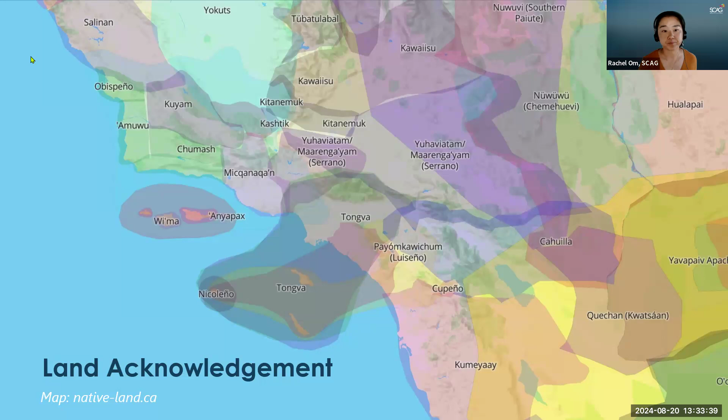So here's an overview of our agenda. We'll be starting off again with an overview of what a quick build project is and some lessons learned from quick build projects in the SCAG region. We'll hear from a few local jurisdictions, so City of Pasadena and their quick build project along Allen Avenue, and also City of Long Beach and the role of quick build projects in their approach to incorporating safety and complete

streets. We'll also hear from Caltrans District 8 about the quick build guidance that they're developing and potential partnership opportunities. We'll also share about a current funding opportunity hosted by SCAG through our Sustainable Communities program, and then aiming to have plenty of time for Q&A.

I primarily focus on managing projects, including active transportation, and as of late, a lot of quick build projects. So what we're going to be talking about in the next 10 or so minutes is a little bit about what is a quick build. So a little bit of an overview on that, typical materials and how elements are manifested through these materials. Timeline and life cycle: what is the expected timeline for implementing a quick build, and what is the anticipated lifetime of a quick build project?

And a lot of these really depend on your situation. We'll also discuss how we can integrate the SCAG kit of parts. This is a very useful tool, and I'll have a small case study of how we've implemented that on the lead up to a quick build project in LA. And then lastly, we'll touch on some lessons learned.

So a little bit about us. We've been around for about 35 years. We provide a whole suite of consulting services, primarily in transportation. And the focus of today is going to be on the quick build aspect that we have provided for several

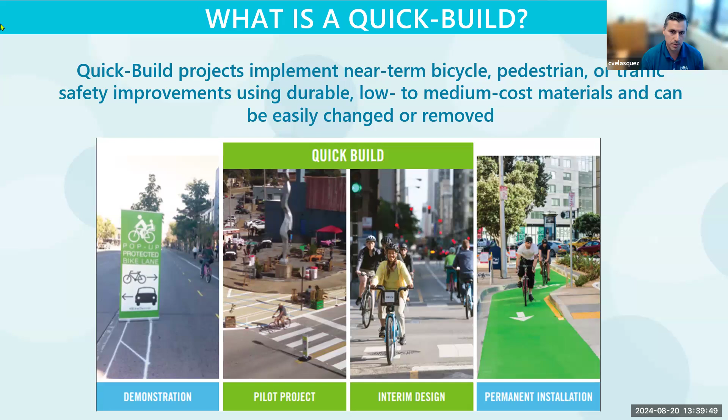And the big part of these is that the city, agencies can easily change them, adjust them to fit the needs, and we'll touch a little bit on that when we discuss timeline, but they can also be relatively easily removed. So again, it wouldn't really involve heavy construction depending on the type of project you have, but it's something that can be ideally easily adjusted, removed if there's an issue, and the like. So that's essentially what a quick build project is, and I'll jump into a little bit more on timeline and those aspects a little later.

So in terms of materials and elements, what I'm showing here are three different projects. A couple of them show similar elements, but they use different materials. So on the left, we have examples of protected bike lanes from Glendale and Long Beach. As you can see in those images, we use different types of materials. Both we use striping, but in the Glendale example, we were able to use K71 bollards.

If you look between where the 2 people on their bikes are, the city implemented Class 4 bicycle facilities and created that physical barrier using K-rail. In this example, the city actually had quite a bit of K-rail available, so they worked with a contractor to have that installed to provide that physical separation. In that example, it was more important because you had diagonal parking, and instead of installing a series of wheel stops between the parked area and the bicycle lane and the buffer, the city installed K-rails to provide that separation. So like that, vehicles as they parked, they didn't go all the way to the curb and intrude into the bicycle lane. So that was very important for this project.

In Long Beach, it's different because you have parallel parking. So vehicles typically wouldn't be going into the curb area and thus blocking the bicycle lane. So that physical separation was a little less critical compared to the Glendale example. But again, depending on the type of facility you're installing, that'll determine the type of elements and materials you want to install.

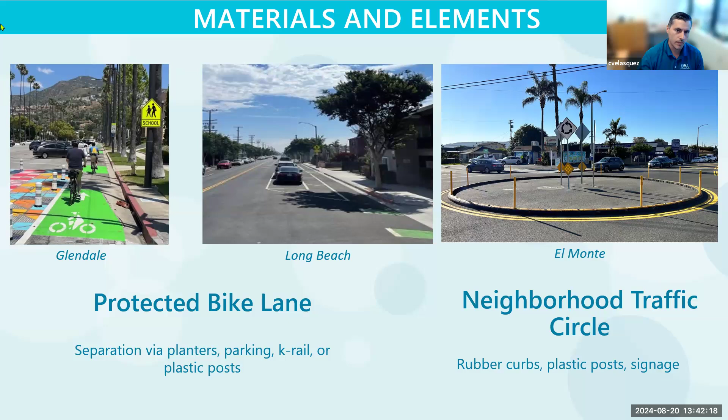And the examples here, again, we're showing a couple different elements. On the left side is what we're calling enhanced pedestrian infrastructure. So again, in Glendale to the left, we use paint and posts to create some curb extensions. The interesting part here is that the city wanted to install a more artistic element at those curb extensions, but still be able to provide some protection for people who are crossing the street. So we use a combination of signs, plastic posts, and paint for the curb extensions.

In LA, this is in Koreatown, in front of a middle school. There was an installation of speed cushions, and we also created a student drop-off and pickup area. So we were able to purchase some rubber speed cushions and use delineators and some pavement paint to create a drop-off and pickup area for students.

And on the right side, this is a project in Calexico, so near the U.S.-Mexico border in Imperial County. A plaza space promenade was created by closing one block in downtown Calexico. So for this, the street was closed using K-rail. Pavement paint was used to create an artistic element to attract people to the space. String lights were also installed, as well as trees in planter boxes.

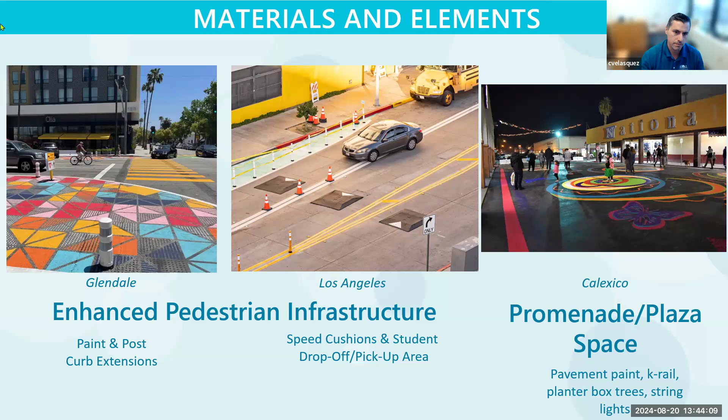So in terms of timeline, what is a typical timeline of a quick build? There are several elements that are tied to this. One key takeaway is you've got to treat a quick build in similar fashion as you would a more permanent installation of treatment. So that means that there's engagement that typically happens, but also design. For all of these examples, our team was able to prepare full construction documents, so full plans, full specs, and full estimates for agencies to then go ahead and put out the bid to procure a contractor. Some cities did some of the work themselves, others went ahead and procured a contractor.

So the big thing on the left side here on the first box is that you've got to allow enough time to not only go back and do outreach if you need to, but also to actually do the design, get it approved, and then procure your contractor. A lot of the times that requires council approval, that requires negotiating with the contractor. So that timeline can be pretty short or can actually extend a full year and beyond. So you need to account for that as you plan out your quick build.

Implementation, the actual construction, can take several days to maybe a month, depending on the complexity of the project. In Glendale, for example, that project took about 2 to 3 weeks to install, and it was pretty invasive to the street. So there were street closures and traffic control associated with it. Whereas with other examples, the installation took about a week. So it just depends on your project, and that typically goes much faster than the first part of the project.

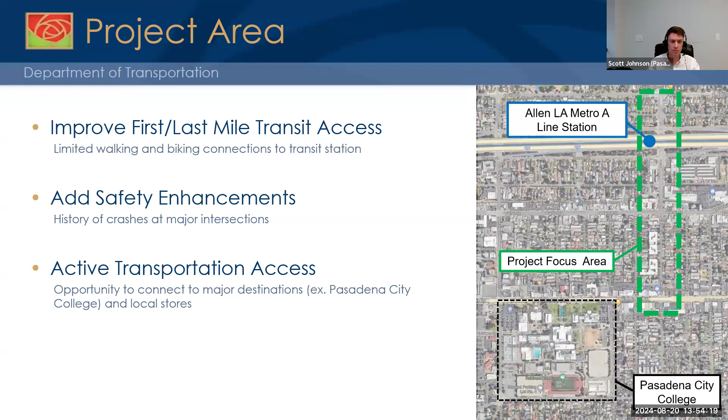To give you a timeline on the project, Carlos talked about how quick build can be part of the overall process, and this puts that into context in this example. The Allen Avenue project was first developed in 2018, where the city worked with the community to identify Allen Avenue as a priority for safety and walking improvements. There's a series of community meetings, and so really a vision plan came together.

Then the SCAG Sustainable Communities Program presented the opportunity to test out quick build, and the idea was really to take that plan and vision and try it out with quick build. And now we're in the stages of taking the lessons learned from that quick build project and implementing more permanent improvements along Allen.

Specifically diving into the quick build project, Activate Allen Avenue, as I mentioned, it was part of the SCAG Sustainable Communities grant program. I know currently there's actually a new call for quick build projects that SCAG is offering, and that's very similar to this project. We saw it really as an opportunity to test out improvements that were envisioned in that initial planning document first put together in 2018, and also a great opportunity to gather community feedback.

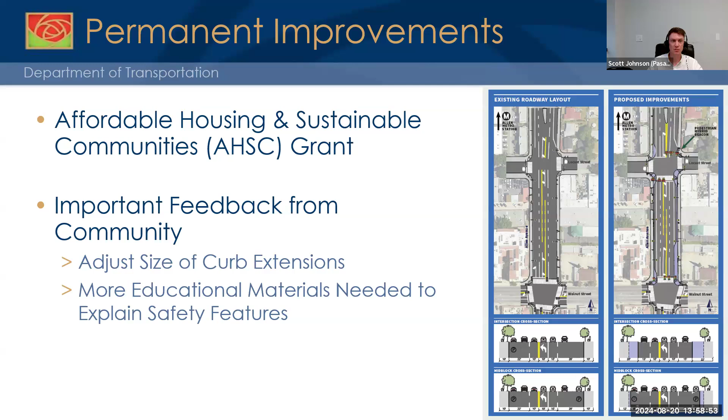And as we look to the future, we thought this is a really good learning lesson about how we can use Quick Build overall in the city. We see a lot of great reasons to try this more. First, it allows much more rapid deployment, particularly if you have a safety issue in your city. Maybe you receive a complaint, there was a fatality, or some other thing where you need to address something very quickly. It's a really great way to advance safety projects.

Also, it really facilitates community feedback. Some people can attend the meetings, but when you actually put something on the ground, it catches people's attention. They can provide that feedback. It attracts a wider audience who can provide input on that project than you might normally see on other projects.

Also, it allows really robust evaluation. Instead of just estimating what the project might do, you can see really what's happening. What are the traffic diversions? What are the changes in volumes of people walking and biking? What are the changes in the safety data?

And as we go forward in the city, we see it fitting into this process of, we still, like all cities, start with planning documents, talking to community, what is the vision for particular areas? But now with Quick Build, we could see that being integrated as, once we have a general planning vision, we can test out different things the community is interested in.

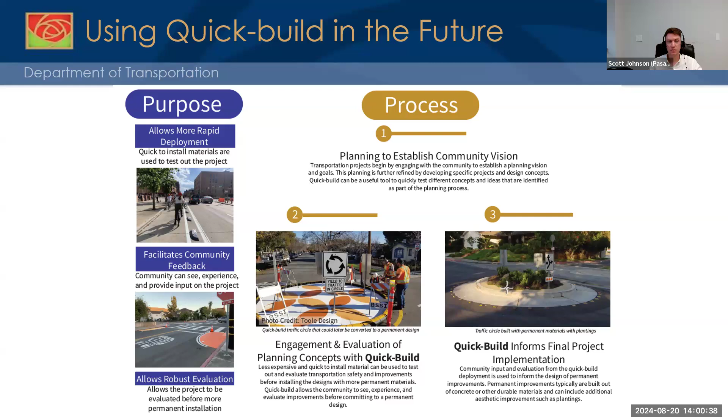We're really excited in the city to try out a lot of different other treatments, expand our toolbox. Of course, you can do all kinds of different things as shown here, but I think a particular one we're interested in is traffic diverters with Quick Build materials.

We had a really good conversation with City of Portland staff, and they almost always use Quick Build materials for traffic diverters, so they can actually see what are the traffic diversions, what are the traffic impacts on parallel streets, and then they can know, should we keep this in? Do we need to remove it? Or does it really work for the community before committing to more permanent materials?

And I just want to thank SCAG for developing this program. It was a really good opportunity for the city to try out quick build materials. We learned a lot of good lessons, and it got us to think through how we might incorporate quick build more along with our other projects that are occurring in the city. And that's all I have there, and happy to answer any questions.

Great. Thank you very much, Scott. I see a question in the chat from Alina asking, how much time on average do you allocate for obtaining permits? So Scott, if you or someone from the city team has anything to respond for that, that would be great. Yeah, I think Rich is on the call. He might be able to talk more to this.

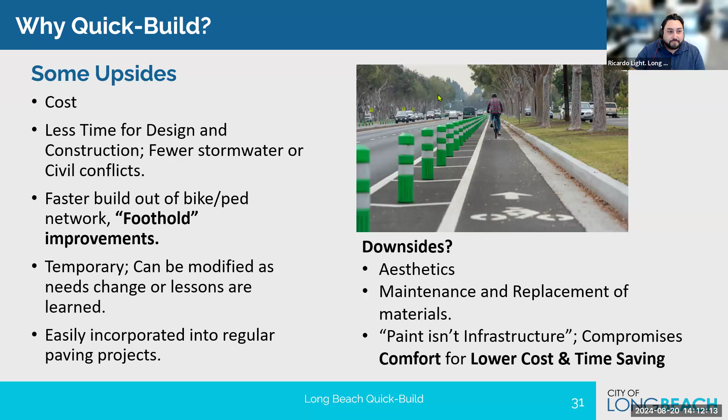One quick note, we like to use paint for markings in the path of a bike, so within the bike lane, just because thermo has that little bit of a height difference, and that's easily detectable by someone who's riding a bike or a scooter. Whereas paint is just kind of a smoother ride, especially if it's in an area where you don't have any vehicle traffic. So the paint would last longer, right, if it's not being driven over by vehicles.

I've also been using our concrete separator a lot more, which will be coming up in a couple slides, and I can talk more about that. And then we also started using kind of rubberized elements. So curb stops, certainly speed cushions.

We are waiting to install our first ZICLA platforms, but I know LADOT has experimented with some of these, namely on Broadway. And so, yeah, these would be used for like temporary bus stops. We've been wanting to use them for passenger loading. So I know there's a question about kind of ADA compliance and access in bike lanes. And so we're looking to pilot ours to address those issues.

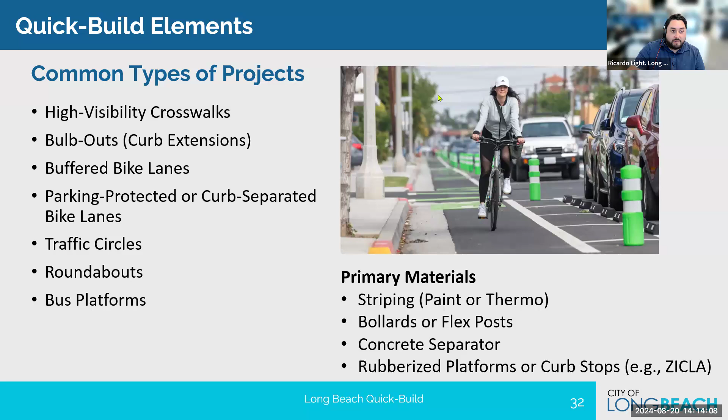So our parking protected bike lanes, our first iterations of these, we definitely used a lot of rubber curb stops and green bollards. We've slowly started to move away from using the bollards, and most of that is just, again, requests from our electeds and the community that they just want something that looks a little nicer. And so lately we've been trying different things.

In some cases, we'll do just striping and then education first. So we'll use signage to kind of show people where they should park and where the bikes should go. And then we try not to, but oftentimes if we need to, we'll escalate that to enforcement. We experiment with different buffer widths.

A big consideration for us is street sweeping. So lately we've been wanting to design our bike lane width and buffer width total to accommodate a street sweeper, so they can get in there and keep the curbside clean. Yeah, so I touched on ADA access. Again, we want to start using those kind of rubber platforms to experiment with those. We have not installed them yet, so I don't have any photos for those yet.

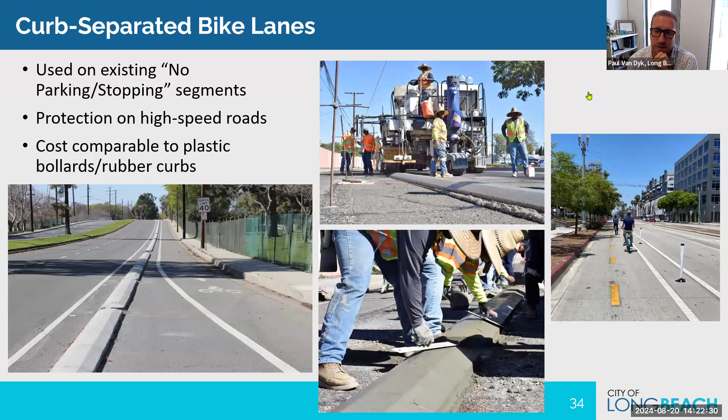Yeah, so you'll notice there that we do have that kind of curved concrete curb in that area. That's there to help enforce the slower turns around the corner. So we do still have curb height vertical elements. However, we are leaving out wheel stops immediately adjacent to the parking spaces, partly to ensure that there's basically a pedestrian aisle next to the parking within that buffer zone where folks can navigate from a parking space to a curb ramp.

But also because many of our treatments here that do involve parking are within parking impacted areas, and the cars themselves serve as the vertical elements. And there's really no need to introduce further items into that cross section of the roadway. For one, they make it more challenging to maintain the street, and they present a maintenance liability in themselves.

The photo in the middle of this slide was designed in such a way that we could operate our full-size street sweeper along the corridor. So the closest point of that curb is 10 feet or more away from the face of the gutter curb, and that allows our street sweeper to operate in that area. Some of our previous projects, like the one at the bottom of the photo, need to be swept using much smaller dedicated street sweepers, which are more difficult to keep operational, and they're tougher to locate around town.

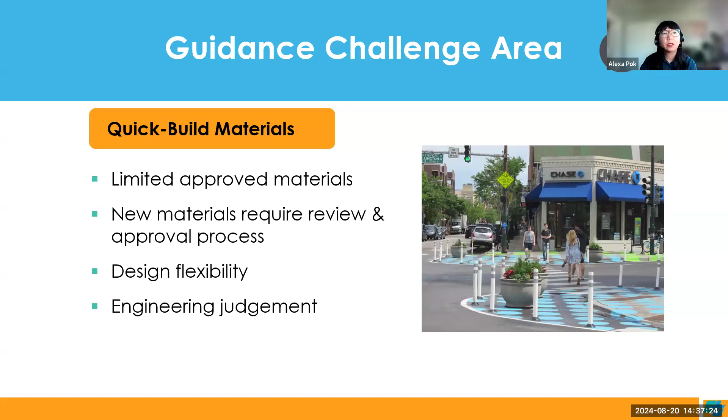Another issue that we received a lot of comments on had to do with maintenance. That's been spoken about quite a bit because of the material durability. Replacement of these materials could be more frequent and could put a stress on Caltrans maintenance crews.

The temporary nature of the installations requires a different maintenance strategy than more permanent projects. And also there may be a need for using more specialized maintenance equipment, like, as we mentioned before, the smaller street sweepers to get into certain width bike lanes, but that's also a permanent project issue.

Also resource allocation. We may need additional maintenance efforts that aren't currently accounted for in our maintenance resource planning. And then lastly, as Raina touched on, the need for a maintenance plan for each quick build project: actually defining a schedule, the allocated funding for the workforce, equipment, and replacement materials and so forth, as well as maintenance agreements. So who would be responsible for the maintenance of these quick build projects?

And depending on the situation, Caltrans may not enter into a maintenance agreement. We may just get letters of commitment, especially on conventional highways. So after highlighting those few topics, I'll hand it back over to Cuong. Thank you.

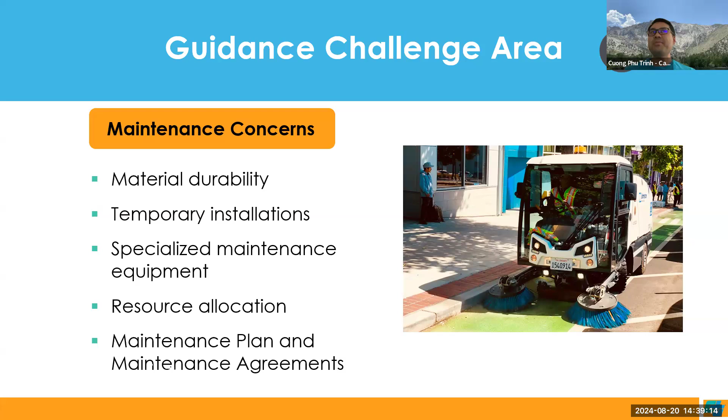Thanks, Alexa. Looking at the future, we're in communication across our Caltrans SoCal districts and SCAG on potential coordination efforts and partnership opportunities on quick build projects, focusing on the state highway system facilities that connect our communities. Some of you may already be participating in ongoing discussions with SCAG, and perhaps those of you in our District 8 service area, which includes Riverside and San Bernardino counties, may already be in communication with us and exploring such opportunities to improve safety and mobility for the most vulnerable of our road users. Should any of our district's partners have interest, feel free to reach out to us.

Next slide, please. And we thank you for your time and SCAG for the opportunity to speak about the development of Quick Build. As the active transportation portfolio manager in District 8, I primarily look for partnership and funding opportunities to plan for future active transportation improvements. I work alongside my colleague, Alexa, who works to implement multimodal elements in existing highway projects using SHOPP, or State Highway Operation and Protection Program funds that are already allocated to Caltrans. Alexa and Raina, would you have anything else to add for this presentation?

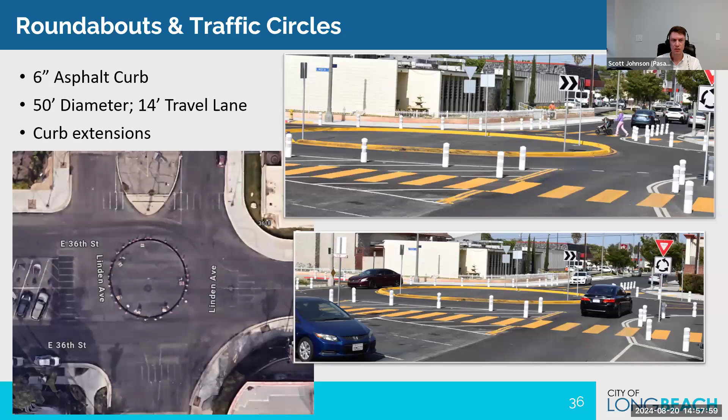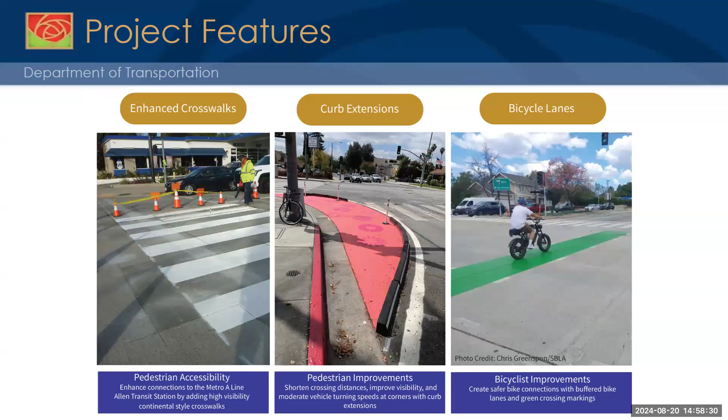Oh, the curb extension, are you talking about? I don't know, Rachel, if you're able to go back to that picture. Maybe just start clicking back. Yeah, so there's 2 components. So the green was the bike lane, and then we did curb extensions on the corner, and there is a grade differential because we're not building out the curb. Sorry to ask about something so far back. No, happy to. The picture will help clarify. Yeah, so basically you still have the existing curb ramp. I'm assuming you're talking about this center red picture. No, actually I think it was one back. Okay. There it is.